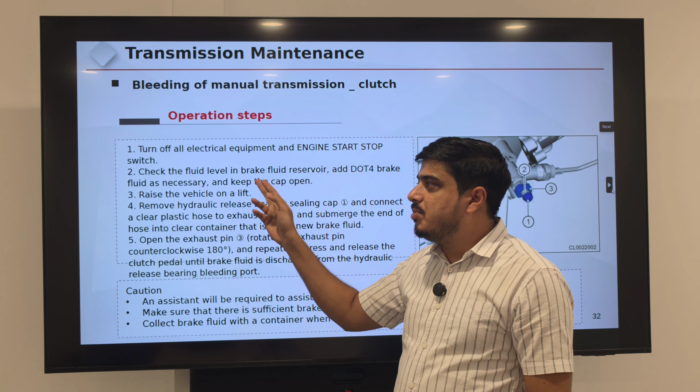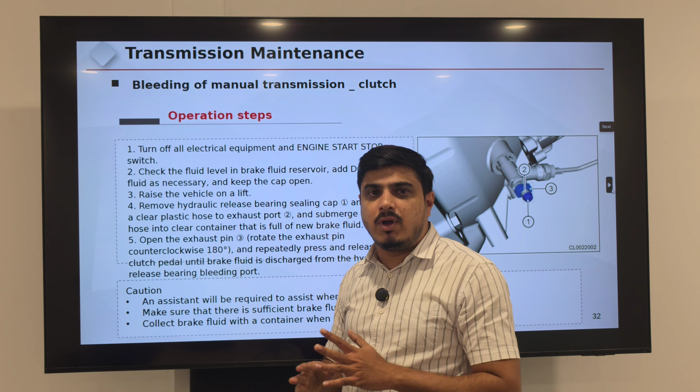First topic in the transmission maintenance, we will learn the bleeding of manual transmission clutch. How to bleed the clutch in manual transmission. First, the operation steps: turn off all electrical and engine start stop switch. All turn off. Next step, check the fluid level in the brake fluid reservoir, and add DOT 4 brake fluid as necessary. The new generation vehicles all use DOT 4 brake oil only. Keep the DOT 4 bottle cap open.

Third, raise the vehicle on lift, remove the hydraulic release bearing sealing cap. This is the release bearing sealing cap here. Fourth one, remove hydraulic release bearing sealing cap and connect clear plastic hose to exhaust port. We have to remove this cap and fix the transparent pipe to release the brake fluid pressure inside the release bearing.

Next, submerge the end of hose into the container full of new brake fluid. One end should be connected to the bleeder pipe. The other end of the transparent pipe should be into the container. We have to collect old oil inside the one container. We should not spill on the floor.

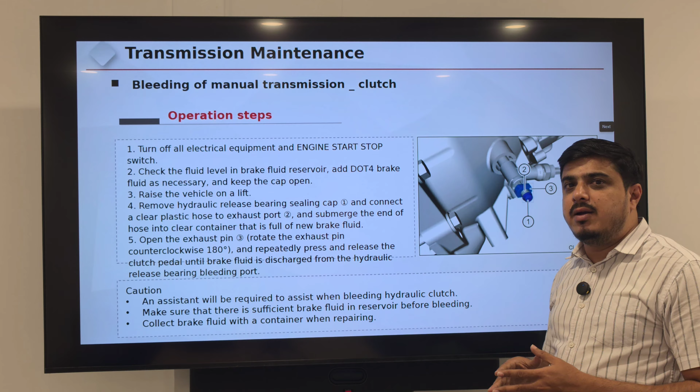We should not spill on our body, or it should not be touched. We have to be careful because it's very harmful for human body also. If you spread it on the floor or on the car body, there will be consequences. The paint will peel off, the paint damage, many things happen. If you spill that oil on your body, many skin diseases will appear. So be careful when you are doing the brake related works.

Then the fifth step, open the exhaust pin, rotate the exhaust pin counterclockwise 180 degrees. This is the exhaust pin. Open it with the spanner, we have to rotate counterclockwise 180 degrees, only half, like this. When you open, the brake fluid from the release bearing will come out from this bleeder hose.

Next, repeatedly press the clutch pedal until brake fluid is discharged from the hydraulic release bearing bleeder port. We have to press the clutch pedal continuously when you open until the old brake oil inside the release bearing releases from the bleeder port.

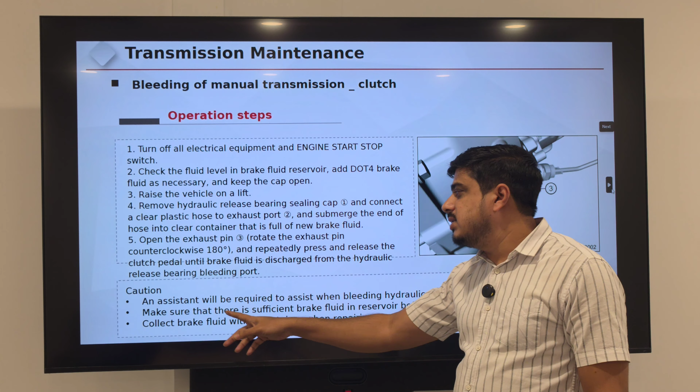Then next, what precautions we have to take here? An assistant will be required to assist in bleeding the hydraulic clutch. Make sure that there is sufficient brake fluid in the reservoir before bleeding. Collect brake fluid with a container when repairing.

You need one more guy when you are doing the clutch bleeding, because one guy should sit inside the driver's seat and compress and decompress the clutch pedal, and one guy should be there in the engine room to open and close the bleeder nut, because we have to take out old oil from the clutch bearing and fill new oil inside the line.

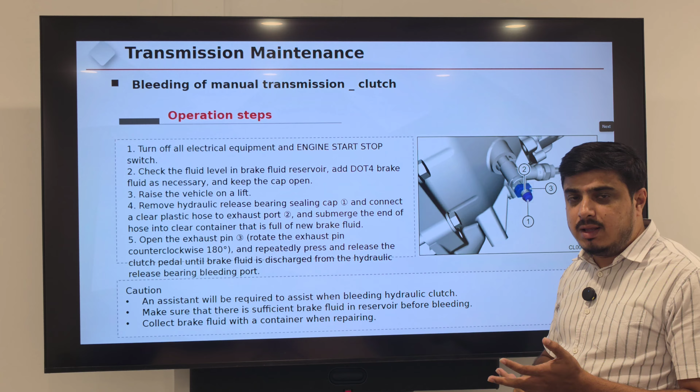And be aware, when you're doing the clutch bleeding, the oil container must be full, should not be empty. You should not allow air to enter the empty passage of the reservoir. Be careful for this. Next, the manual transmission clutch bleeding operation steps.

Next, depress the clutch pedal and close the exhaust pin. You have to depress the clutch pedal. Then this clutch bleeder nut, you have to rotate it back. Anti-clockwise is open, clockwise is close. You have to rotate the nut clockwise, then tighten the bleeder nut. You have to press the pedal first, then tighten the bleeder nut.

Then you have to depress it again and again. You have to check the feel of the clutch pedal. Then you have to shift the gears and check. If it is the same, then you have to repeatedly press and release the clutch pedal until there is pressure in the clutch system.

You have to continuously press and release the clutch pedal until it reaches the pressure in the clutch system. Then depress the clutch pedal to its lowest limit position and hold. Then open the hydraulic release bearing exhaust pin.

Again, you have to do this multiple times, press and release the clutch pedal. Then finally, hold the clutch pedal in the pressed condition, and release the nut.

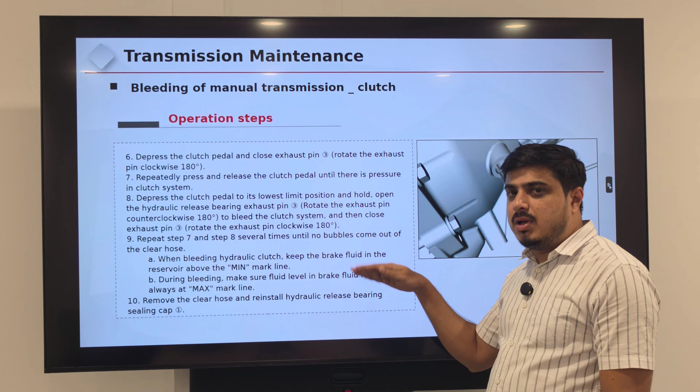When bleeding the hydraulic clutch, keep the brake fluid in the reservoir above the minimum mark. It should not go below the minimum mark, otherwise it will suck air back into the system. During bleeding, make sure the fluid level in the brake fluid reservoir is always kept at maximum.

When bleeding the hydraulic clutch, keep the fluid above the minimum, and during bleeding, keep it at the maximum.

Remove the clear hose and reinstall the hydraulic release bearing cap. After finishing, remove and tighten the bleeder nut, remove the hose, fix the cap back, then press, depress, and release the clutch pedal.

Check the gear operation after pressing the clutch - is it smooth or not? If it is still not smooth, there is a possibility of water entry or air entry inside, meaning there is still a bubble inside. That's why the gear lever is not shifting smoothly, so you have to repeat the same procedure again.

Next, the bleeding of the transmission clutch. Last, check the brake fluid in the reservoir and top up the brake fluid to the max mark line as necessary, then tighten the reservoir cap. You have to check the reservoir tank quantity of oil and keep it at max level, filling the oil to bring it to max level.

Then tighten the cap of the reservoir. Test the vehicle, make sure the clutch operates normally and the depressing feel is good. If it is not good, bleed again; if it is good, that's it, stop there.

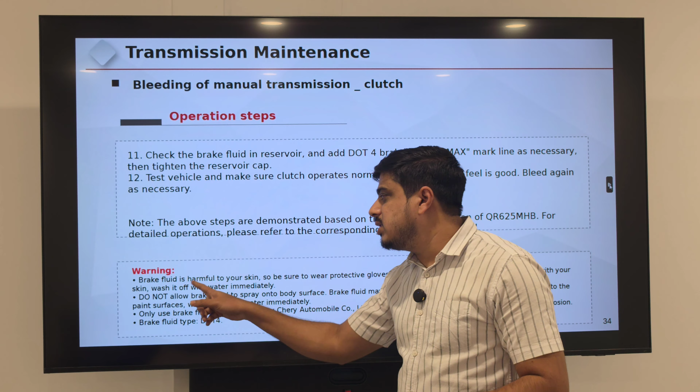So what is the warning sign when doing this? As I told you, the brake fluid is harmful to your skin, very harmful to human skin. If you spill it on your body, be careful and immediately wash it off. Do not leave it for a long time.

Be sure to wear protective gloves before operating. Once brake fluid contacts your body skin, wash it off with water immediately. It should not be left for long.

Do not allow brake fluid to spray onto the body surface or any body surfaces of the vehicle. Otherwise, the brake fluid may damage the paint surface. If any brake fluid leakage gets onto the paint surface, wash it off with water immediately. If you see brake fluid spilled on the vehicle body, immediately wash it off with water. It should not be left on that. Be careful when doing it.

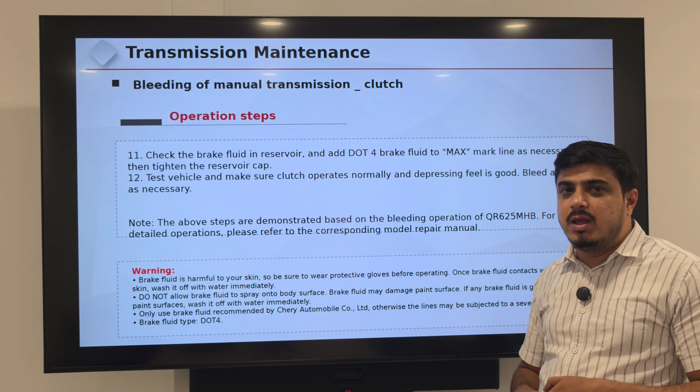Only use brake fluid recommended by the manufacturer, otherwise the line may be subjected to severe corrosion. Only use the recommended oil from the manufacturer - if you use a lower grade, there will be severe consequences.

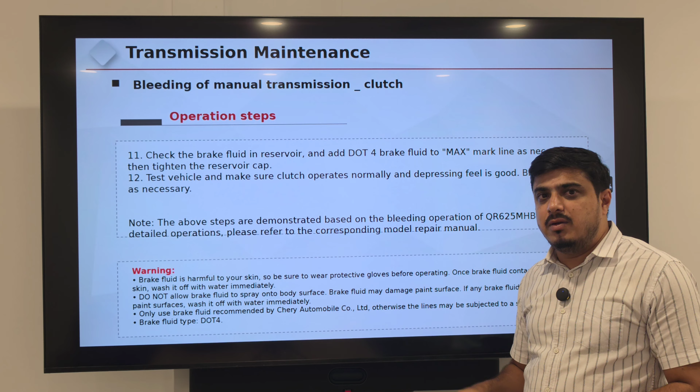The brake fluid line will start to corrode. If corrosion starts, there is a possibility of damage to parts, lines, and pipes. If damaged, the brake will fail. Be careful - the brake fluid type is DOT4. The current generation of all vehicles uses DOT4 grade brake fluid.

Now the transmission draining. How to drain the transmission oil of a manual transmission? The first step: turn off all electrical equipment and the engine start-stop switch, all switches off. Then raise the vehicle to the proper height and place the recovering container under the transmission drain hole.

Where is the transmission drain hole? This is the transmission drain hole. Place the oil drainer below this, and use the tool to remove the transmission limit bolt, which is indicated by the arrow. This is the limit bolt, also called the drain bolt. Remove the bolt and washer. Along with the bolt, there is a washer to protect against leaks.

Replace the drain plug washer and tighten the drain plug after draining the transmission. Every time you replace the transmission oil, you have to replace the washer and drain bolt. Must and should. Tightening torque, please refer to the corresponding manuals.

The above steps are demonstrated based on the bleeding operation of the manual transmission. The detailed operation must be referred to the corresponding manuals. Warning sign: replace transmission oil only when the transmission stops and cools down. When you replace the oil, the vehicle should be in cool condition, not hot, and should be in stationary mode, not moving.

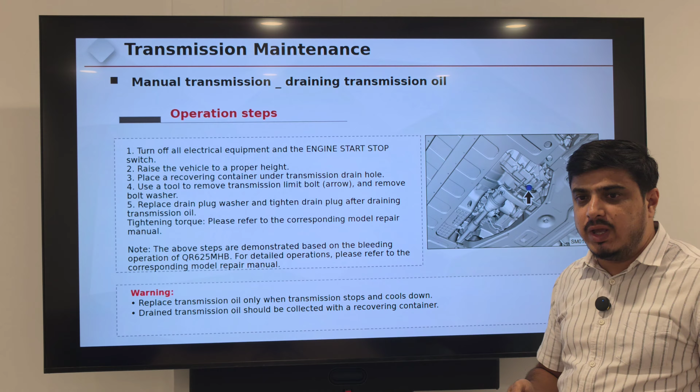Drained transmission oil should be collected with a recovering container. The drained old oil, when you drain it from the transmission, you have to collect it in a container jar and confirm how much quantity you drained, then decide how much quantity as per the standard manual, and how much less was recovered.

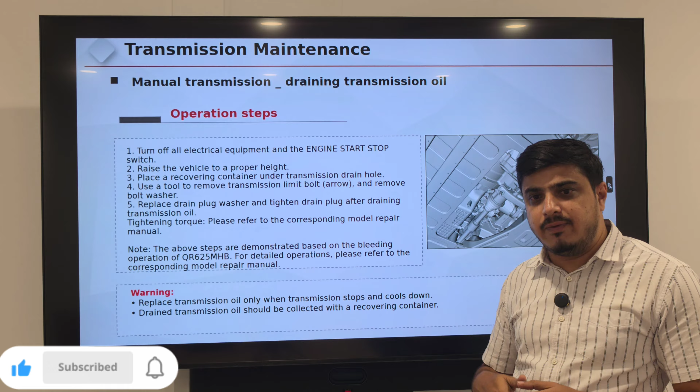Then we will fill according to that measure. We should not put more, we should not put less. If you put more, there will be consequences, like damage to the inside seals, which will then start leaking. If you put less, there will be less lubrication, less cooling, then friction will start, wear and tear will start, and it will start making noise. Both cases you have to keep it at standard level, not more, not less.

Next, the operation steps of filling the manual transmission oil. How to fill it? Make sure the transmission drain bolt is tightened in place, as shown before, and use the socket wrench to remove the transmission filler bolt.

This is the filler bolt of the transmission. Use the proper socket wrench to remove the transmission filler bolt and remove the bolt washer. Then fill lubricant: after removing this, fill transmission oil inside from the filler port until the lubricant level is between 0 to 5 mm from the lower lip of the limit bolt.

This is the limit bolt. When you are filling, fill until 0 to 5 mm from the limit bolt. When you remove the limit bolt, the oil starts dripping continuously. You have to wait until it is dripping in drops, then close the bolt back. If it is continuously dripping, there will be excessive oil inside the transmission.

After filling the oil, replace the bolt washer and tighten the filler. We have to replace the bolt washer on both the filler and drainer. Tightening torque is as mentioned in the manuals. The above steps are demonstrated as per the manual transmission. For any extra details, refer to the manuals.

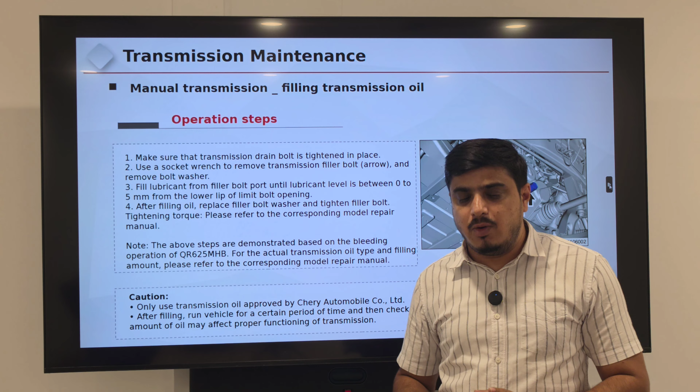Caution: only use the transmission oil approved by the manufacturer. You have to use the transmission oil as recommended by manufacturers; you should not use any other oils. After filling, run the vehicle for a certain period of time, then check the oil level. You have to drive the vehicle on the lift and recheck the oil level.

An excessively large or small amount of oil may affect the proper functioning of the transmission. If it is less, if it is more, there will be different consequences as I said before. If it is less, there will be friction, wear and tear inside the transmission's rotational parts. If it is more, there will be consequences of damaging seals.

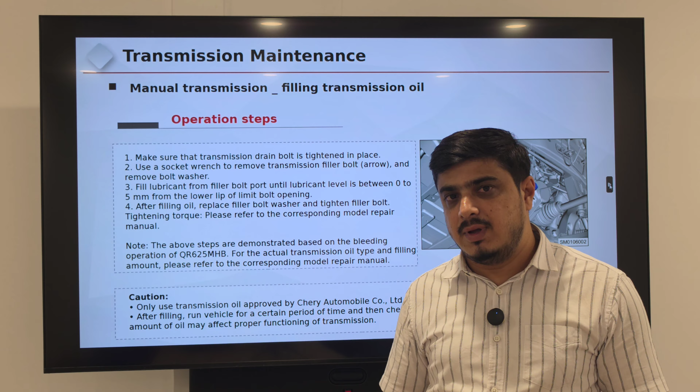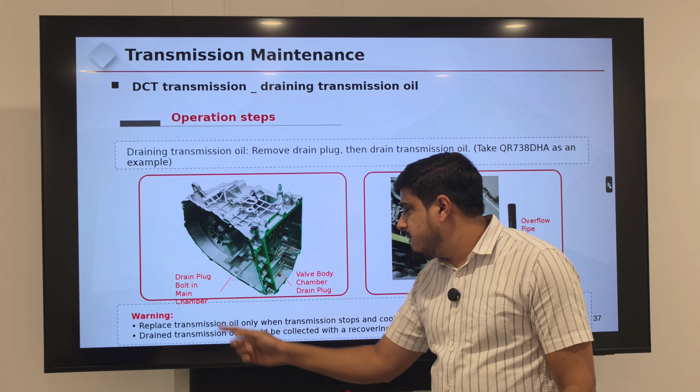Next, the DCT transmission. Draining transmission oil in DCT. How to drain the transmission oil in a DCT? Remove the drain plug. Where is the drain plug? This is the main drain plug here. Here you can see the drain plug and the tube. What is this tube given for? This tube is given to make the level perfect inside the transmission.

This is the DCT warning. This is the drain plug, located in the valve body area. It's clear and has two types: one is an Allen key for draining, and the other is used to measure the quantity or level of oil.

Replace the transmission oil only when the transmission stops and cools down. The vehicle should be in a stationary and cool condition, not hot. Drained transmission oil should be collected in a recovery jar to measure how much oil was drained, which makes it easier to know how much to refill.

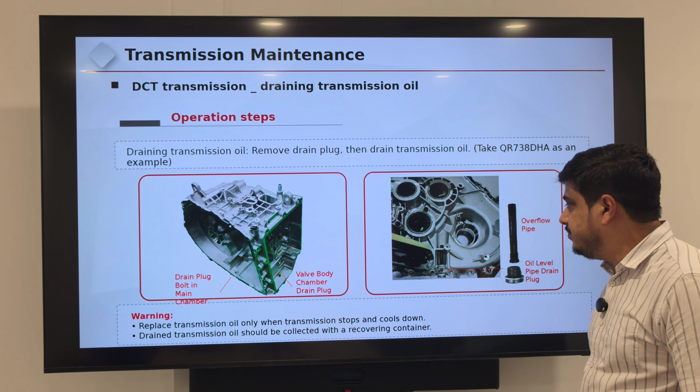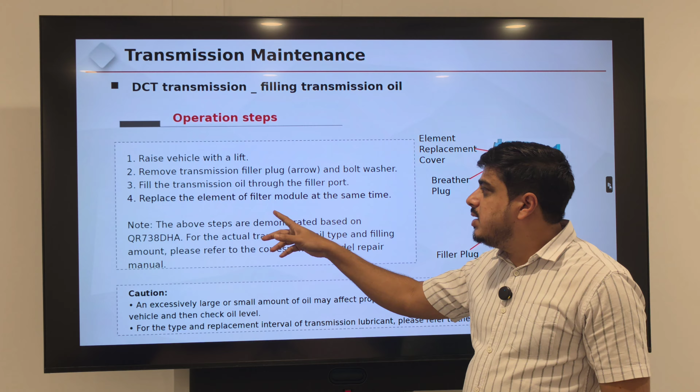You have to fill the oil from here, and at the same time replace the transmission filter element. The above steps are demonstrated based on QR738DHA.

For the actual transmission oil type and filling amount, please refer to the corresponding manual.

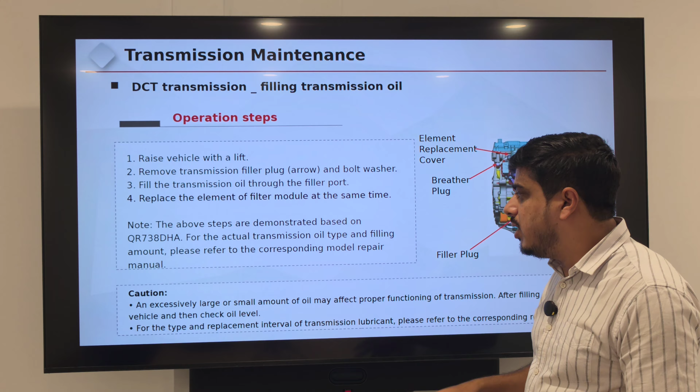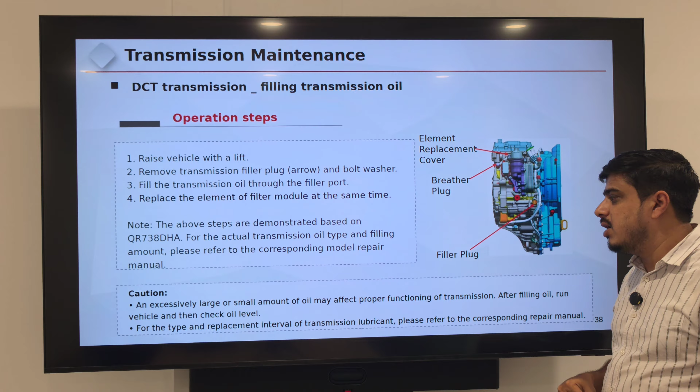What is the caution you have to take care about? An excessive large or small amount of oil may affect proper functioning of the transmission. After filling oil, run the vehicle and check the oil level. For the type and replacement interval of transmission lubricant, please refer to the corresponding manuals.

Next, transmission filling - how to fill the DCT transmission oil. The prerequisite for replacing transmission oil is that the temperature must be between 35 to 45 degrees when you are filling the DCT transmission oil.

The drain bolt and oil inspection bolt are both non-reusable. They should be one-time use, and replaced with new ones after removal. Once you remove them, you have to replace with a new one.

The vehicle must be kept level during refilling. You have to keep the vehicle on a flat surface, not tilted up or down, when refilling the oil.

To avoid oil contamination, the container used to store the transmission oil must be special - you should not use the same container if you are draining engine oil, transfer case oil, or differential oil in it. Using that same container to fill new transmission oil is not accepted. You have to use a separate container for each and every oil. It should not be contaminated, otherwise it will affect your transmission more and there will be bigger consequences in the future.

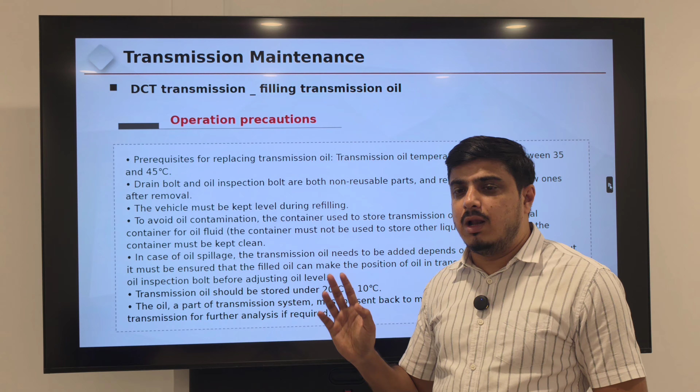The oil, as part of the transmission system, must be sent back to the manufacturer together with the transmission for further analysis if required. If there is a warranty related issue with the transmission, and the manufacturer asks you to provide the transmission oil along with the transmission, then you have to provide it. So when replacing the transmission under warranty, you have to keep the transmission oil also along with the transmission, since we don't know when the manufacturer will ask for the oil to do a major analysis.